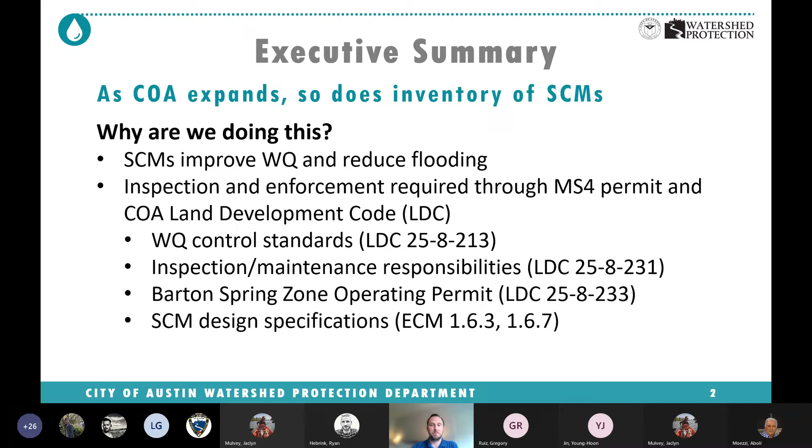Just to give a brief picture of what we're looking at here, this picture is the city of Austin. That's actually not the whole jurisdiction, but everything in blue is a commercial pond, and these ones in yellow are the residential ones. So obviously they're all over town, ETJ. We have about 8,300 commercial ponds, 1,050 residential, and about 265 of these Barton Springs Zone operating permits. And we're going to get into each one of these programs a little bit.

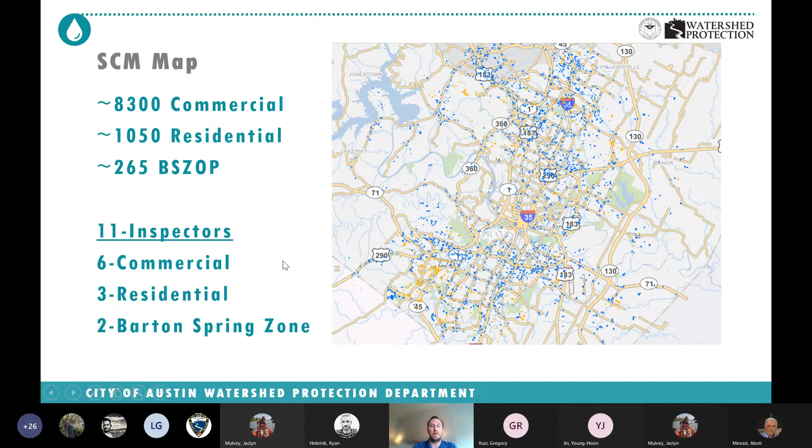The commercial ponds and the residential, we are on an annual inspection cycle, so we're hitting every one of these on an annual basis, or that's the goal. And then the Barton Springs operating permit, at a minimum, these are annual, but a lot of the technology, specifically the retention irrigation technology, gets multiple inspections a year. For a breakdown, we have 11 inspectors on staff, 6 commercial, 3 residential, and 2 Barton Springs Zone currently.

The point being is that we've been doing this a long time, and each one of these is laying the groundwork and foundation to build upon each other to improve our water quality and reduce erosion, etc. I'd like to just start with how do we get here? How does a pond, or SCM, end up in our inventory? This is just a cover sheet of a typical construction plan.

This is called a C8 plan. Basically, that's the type of plan for construction of a subdivision. But we have some review that's conducted on SCMs that are in the Barton Springs operating permit. So on the front end, we have some review touch points where we're looking at some of these plans before they're permitted to make sure that they meet code and criteria.

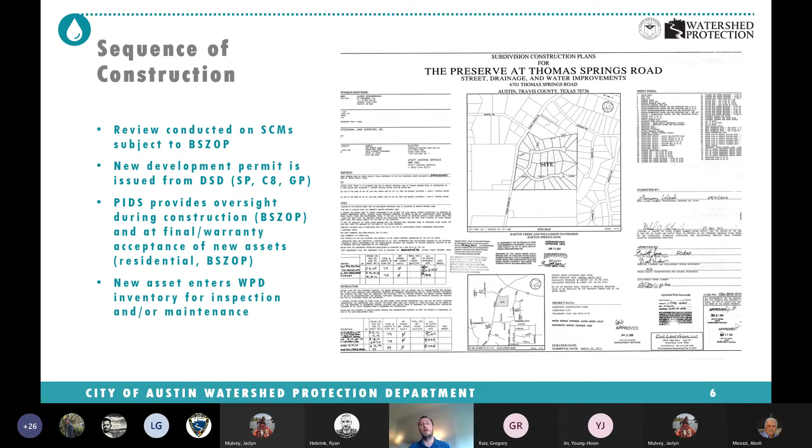Our pond inspection group, pond inspection dam safety, we have some oversight during construction. In the Barton Springs zone, they have oversight from cradle to grave on these ponds. And then on the residential side, we do warranty inspections as well during the construction period to make sure that we're getting assets that are going to be functional whenever they're in our groups to maintain. And then on the commercial end, every new asset that passes final inspection gets put into GIS, which in turn makes it an asset in Maximo for us to inspect.

I'd like to just lay this out there to show some typical layouts of how these ponds work and some different types. So this is a single phase pond. Basically, it's got a single basin. There's a few different types that work this way, detention and rain garden, some retention irrigation ponds. But basically, you have water that's coming into an inlet structure being conveyed through either overland or piped. This inlet structure usually has a splitter weir in here that sets the elevation for water quality elevation. And then if it is too much, it'll go to a flooding basin or out to the creek.

Water comes in. There's an outlet structure. If it's a detention pond, there's usually some orifices here, different holes that are cut out at different elevations to slow this water down and meter it as it is getting out of the SCM. And then typically there's an emergency overflow here, or sometimes it's in the splitter box.

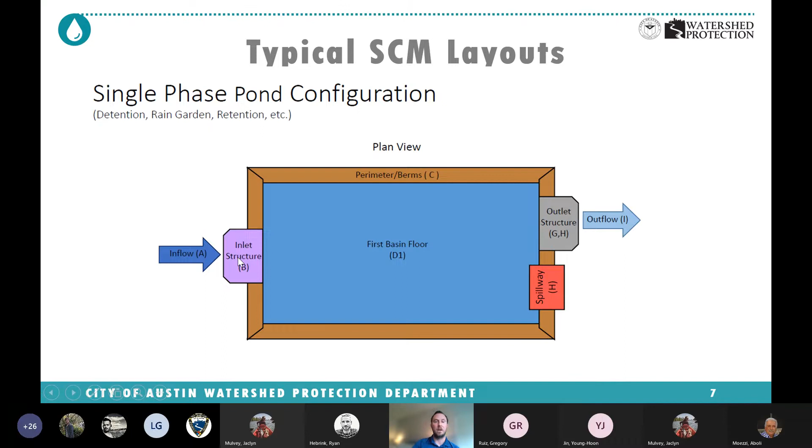This is kind of a dual phase. This is what we would consider a full sedimentation filtration, meaning that water still comes in that same inlet structure with the weir, but there's two different basins. So there's a first basin here with a concrete separator wall. This is the sedimentation basin. This will hold the whole water quality volume of the whole asset in this basin, and then it'll filter through this riser pipe into the second basin, which has the sand and filtration for the water quality, and then out.

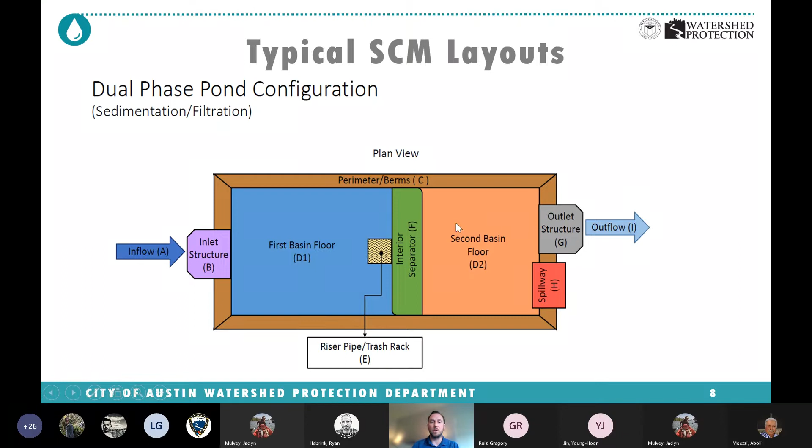Sometimes you'll hear full sedimentation and partial sedimentation filtration ponds. The partial just means it has a rock gabion wall instead of the concrete wall here, and then the water quality volume will go across both basins at once instead of just one.

And this is a typical wet pond layout. Same thing, you've got water coming in, inlet structure, you have a sediment forebay, which is basically the first location to have sediment, trash, pollutants drop out. There's an interior separator berm usually, and this is all planted with different wetland plants and aquatic plants that are doing biological processes to remove the pollutants from the water that's coming in here. And these typically have a permanent pool, so usually they're always wet.

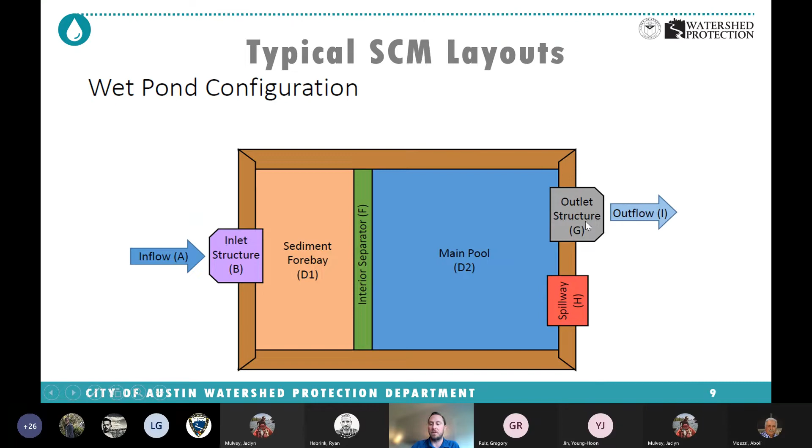So after it goes through there, there's usually a pipe through this to the main pool. And then same thing, there's the outlet structure. This is usually an inverted pipe to set the elevation of the pond. And then there's an emergency spillway. So in general, water and pollutants in the first bay, capture it here, filter it into the second one, and then overflow for detention purposes. So that's a really brief breakdown, but that's kind of just how each one of these work.

So I'm going to go into each one of these different programs just briefly. The Barton Springs operating permit is a permitting program for water quality ponds in the Barton Springs zone, this area here. So basically new commercial developments, privately maintained, that are going to be built in this area are subject to this operating permit. There's some caveats. There's some grandfathering: basically if you platted your land before the Save Our Springs rules and these operating permit rules came into effect, you could be out of this. But in general, most of this area is subject to the operating permit. It's a cradle to grave permit, from the time it ends construction and then in perpetuity.

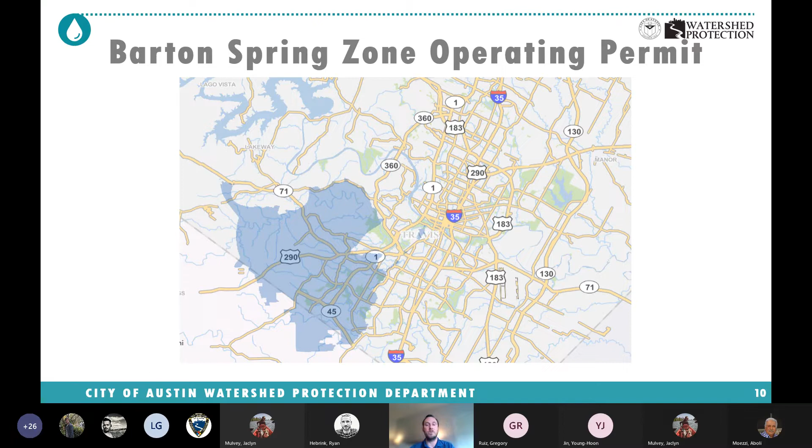Just going to show you a little bit of some of the projects in the Barton Springs zone. So this is new construction of a water quality pond going in. This is an impermeable liner, a geomembrane liner that's being attached to concrete walls to basically hold the water quality volume in this basin. They also added filtration, sand filtration basically.

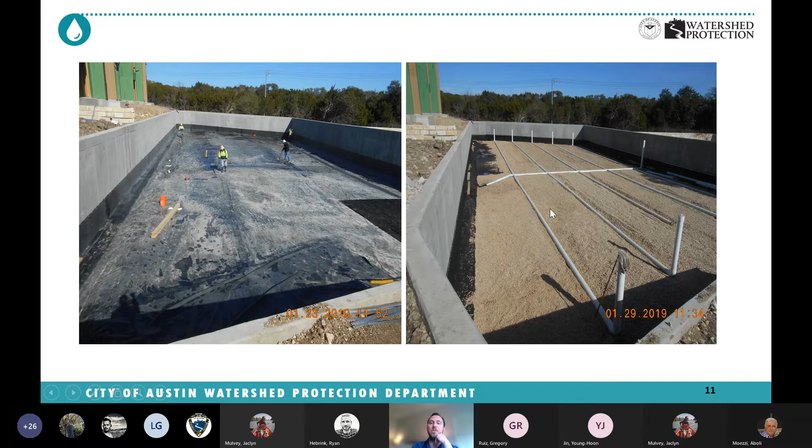This is a retention irrigation pond. So you can see that they put in the liner first, they put in the sand filtration, they work their way from the far corner out as they're creating this. And then the purpose of this is to make sure that this thing holds water. And so in this particular system, this is what we would call a leak check.

Typically we wait for a large enough rain that will fill the basin, and then the inspectors will turn off the equipment so they can see, is it holding water? There's only one way for the water to get out in these. It's through the pump equipment. So we do some monitoring to make sure it's holding water on new construction. It's a little bit different animal.

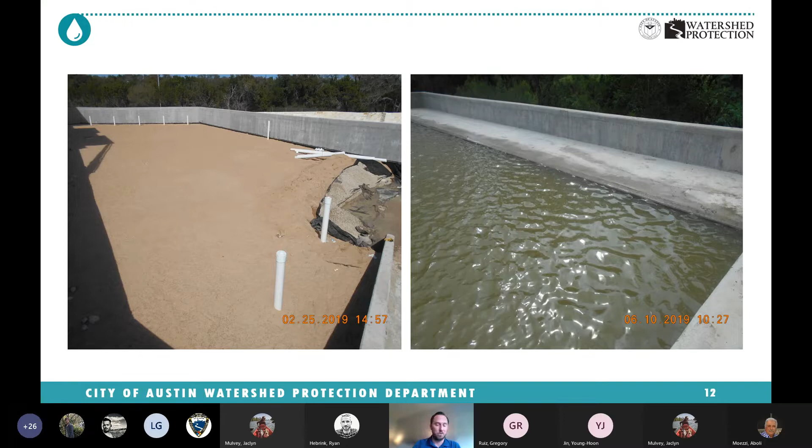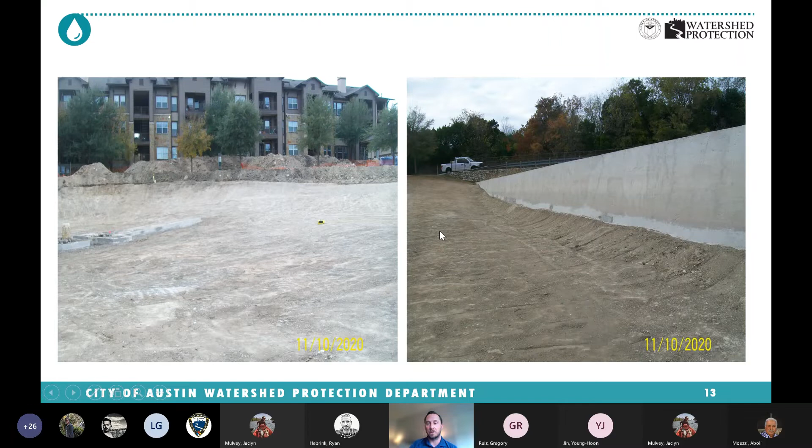This is post-construction. So this is a site that's been in operation for over a decade, but it was determined through inspections that the basin couldn't hold water. It was leaking and it needed a new liner. It's really the only way to fix it. After documenting this and issuing violations, working with owner and engineers, the inspectors were able to convey that, look, this isn't holding water. Here's some options. And so they decided to come back in and put in a new liner on this existing system.

I think this is a great picture because it's hard to see, but these are one-way check valves to basically isolate this basin from the rest of the system. We're trying to prevent leaking, and there's storm sewers, et cetera, that are beneath the water quality volume that could leak. So trying to isolate that with these one-way check valves.

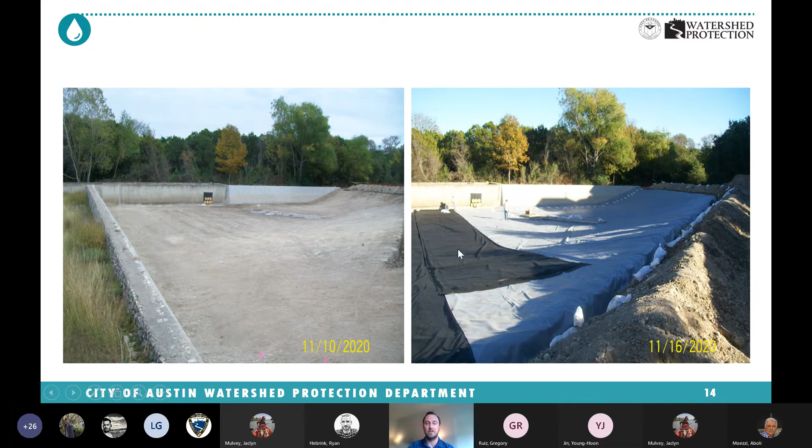And then you can see on the right-hand side, the liner going in, you have this anchor trench where they anchor it into the soil berm above the water quality elevation. And then they put this protective geofabric over it. And then you come in with 18 inches of soil typically as protective cover over the liner to protect it from any penetrations. And then you'll sod or grass this to get grass growing.

So just kind of a typical project. I wouldn't say typical, but it's a rehab project on a lot of these older systems that are failing infrastructure. I don't know the exact dollar amount on this, but these are not cheap. These are expensive repairs in the hundreds of thousands of dollars. So it's not an easy task.

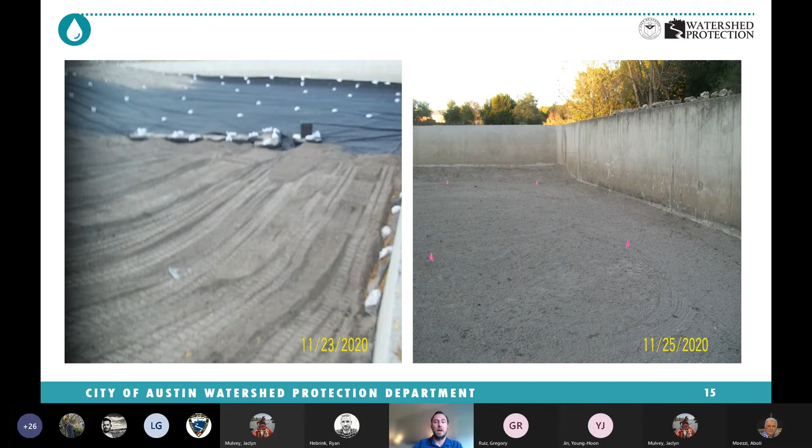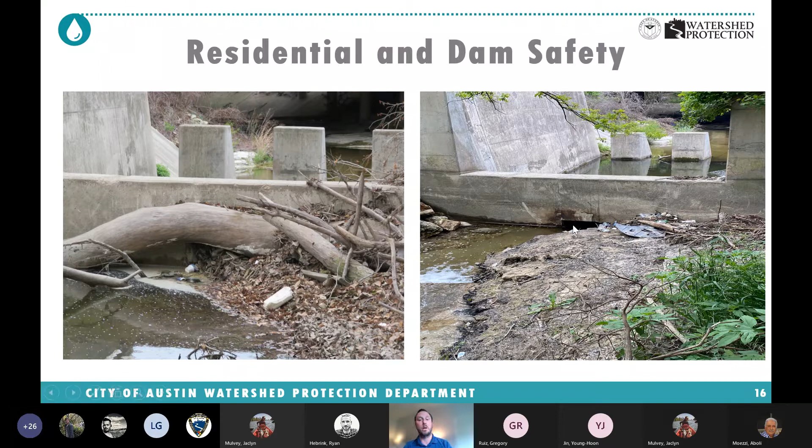I'll shift briefly to the residential and dam safety team. So this is the team that coordinates with our other groups for ponds that Watershed owns and maintains. As you can see on the left, this is Palmer Dam, and this is on a pre-storm recon by the inspector for dam safety. If we know that we're going to get a large enough storm that could engage some of these ponds, they come out and take a look, noticed this was blocked up, got with our field operations crews, and they're amazing, and we're able to get out there and clear this so that this outlet can be functioning properly whenever this storm hits.

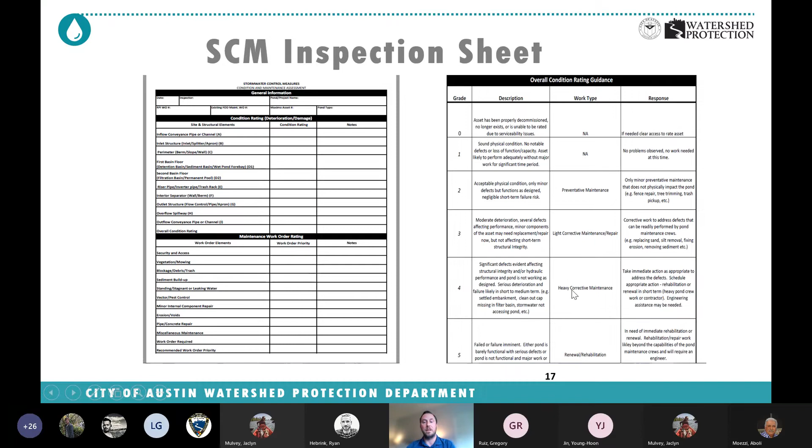I'm not going to go over all the ins and outs of this, but this is basically the pond inspection sheet that our inspectors use. On the residential side, we're giving condition ratings to all these different elements of the ponds in order to get a larger picture of the condition ratings across the board. Without dumbing it down too much, 3, 4, and 5 means that some sort of work needs to happen. 3 is light maintenance, 4 is heavy maintenance, and 5 is it's completely failed, needs rehab.

So on the residential side, it's a lot about collaborating with other work groups. It's a cross-divisional and cross-departmental effort to get these SCMs addressed. Our role is to basically identify the problems and then coordinate with the other groups to figure out the best way to get these addressed. We also make the work orders for our field operations crews, so we are working hand in hand with them. And I also feel like we have a role as advocates for maintenance activities.

So as the city expands, as the commercial and our own inventory expands, we have innovative technology that we're employing, which is great, but we also need to consider, and I think that we're doing a good job of this as a department, what are the maintenance and responsibilities for these types of SCM.

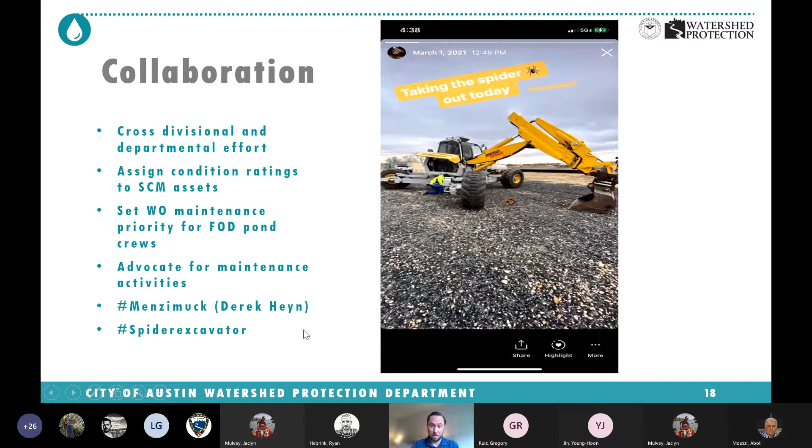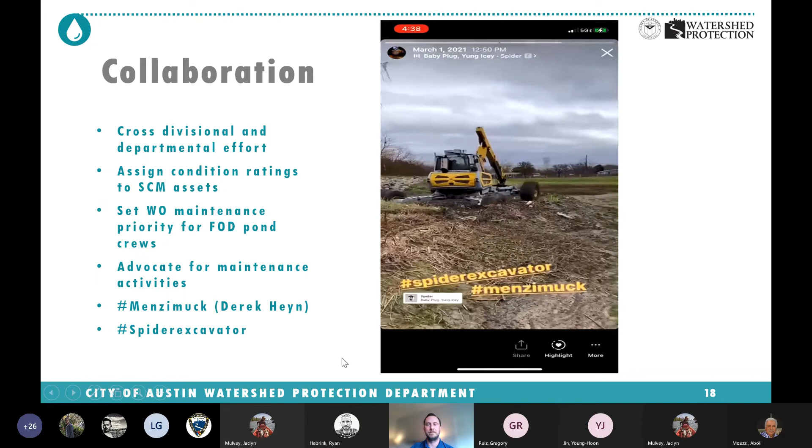Itsy bitsy spider ran up the water spout. Down came the rain and washed the spider out. Out came the sun to dry up all the rain.

I hope y'all can hear the music. But Derek and some of the FOD crews, the pond maintenance crews especially, they're trying to do a good job, and in my opinion, showcasing their work. I mean, this is a great 15-second clip to just set to some music that showcases some of the work that they're doing, and also this pretty amazing piece of equipment that can help them and us get to hard to reach maintenance activities. Here's another one that he sent over.

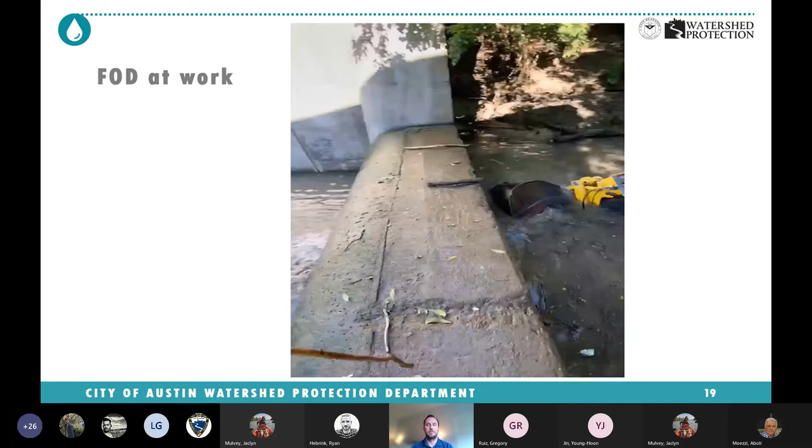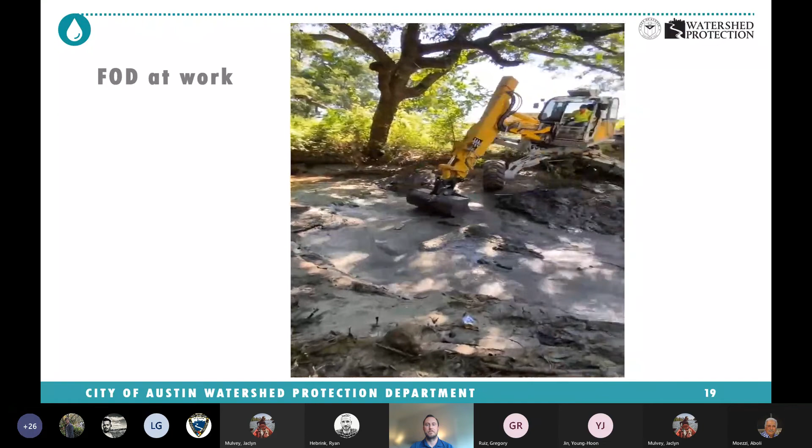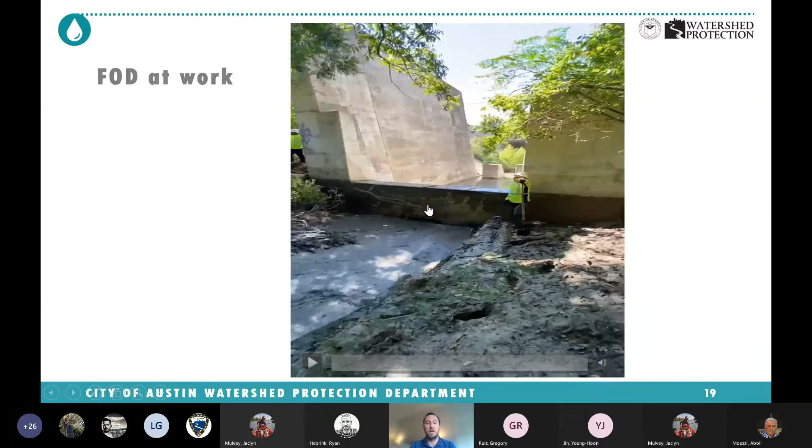Really good piece of equipment. This is actually that same Palmer Dam, different time, but clearing out the debris that's getting clogged up on this outlet. So big shout out to them.

And then we also have coordination with other groups within Watershed. Local flood group, now in PDD, but David Trujillo and Pam Kearfott's group. This is a dam called Mearns Meadow. It's a large regional detention pond that is considered a TCEQ dam. Their group was working on modernizing this dam, upgrading it, and as part of that, we coordinate to get some of the maintenance items addressed that needed to as part of the dam safety program.

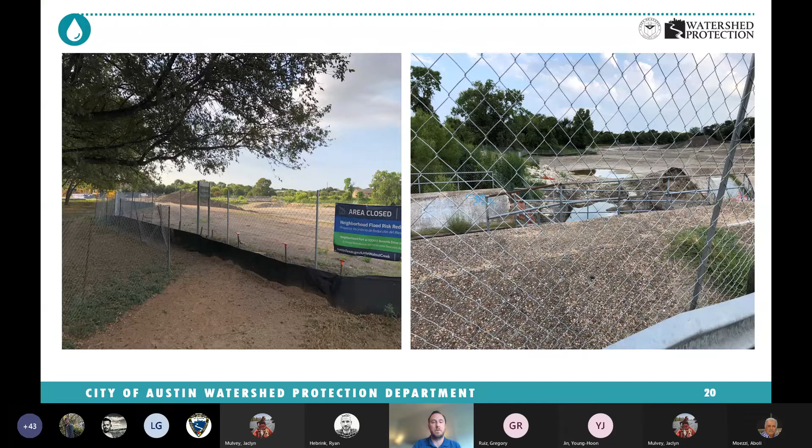So, just big shout out to them for being so willing to work with us and to incorporate some of our needs into their projects. So I think this is a huge success story. Same here. This is working with another group within Watershed, formerly the Water Quality Group, but again in project delivery. This is Tom Frankie and some of his colleagues.

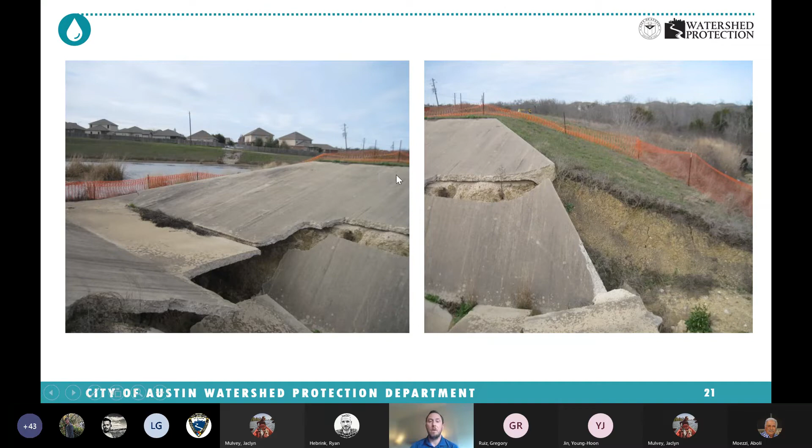This is a wet pond at a subdivision, Quintera, where through either, I don't know if it's design or just how it was built, but this emergency overflow had obviously failed. And so we had identified this as a problem, but originally we were trying to have our field operations crew do this, but in general, this was kind of above and beyond their capability to do in a timely manner. And so Tom sponsored this project and with others and used the IDIQ, which is indefinite delivery, indefinite quantity contractor that we have basically on retainer to come in and fix this outfall.

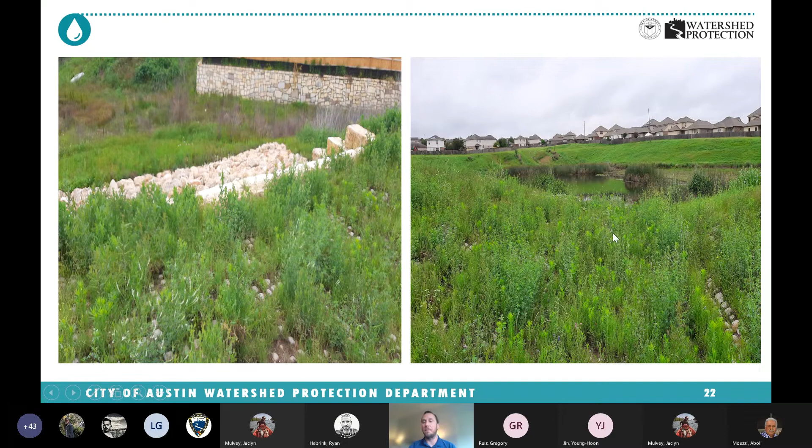So this is called Flexamat. It's a concrete that's laid out with vegetation allowed to grow in between it, and it basically locks this all in place with these limestone block outfall. So basically it went from this outfall that was failing, wasn't working to this new design that's working properly in a nice, beautiful wet pond that's been reinforced, but has also kept some of its natural characteristics.

As I talk about the commercial inspection and move to our enforcement side, this is just a video that I got the other day I thought was relevant. This is something that we get fairly frequently, and I feel is an important part of our job.

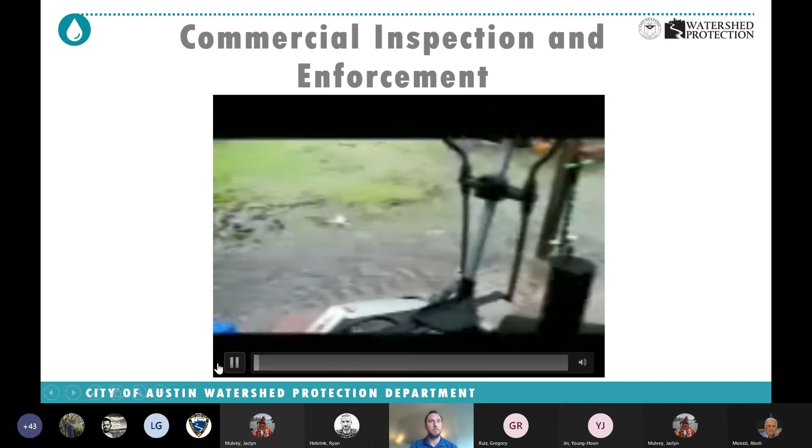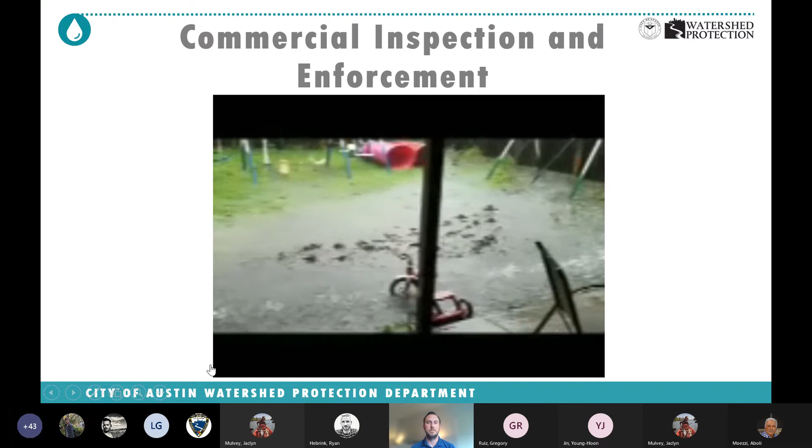Okay, the water's reached my patio now. That retention pond is flooded over, coming to my backyard. There's a stream coming straight from the retention pond.

So this is a homeowner who sent in a video. They live next to a pond that was not functioning properly. And so basically the outlet had been clogged, and so it was overflowing in a way that it shouldn't have been. Some of the berms were low. This to me is when people ask me, what do you do for the city, or how do you make an impact with our tax dollars? I mean, this is, in my opinion, a great example.

I mean, this is a situation where this pond wasn't working right. Homeowners were getting flooded. We were able to, through our commercial inspection and enforcement program, issue violations and work with the neighboring property owner to get it rebuilt and fixed. And I got some pictures I'll show you of it here in a second. But yeah, this is fairly typical on the commercial side.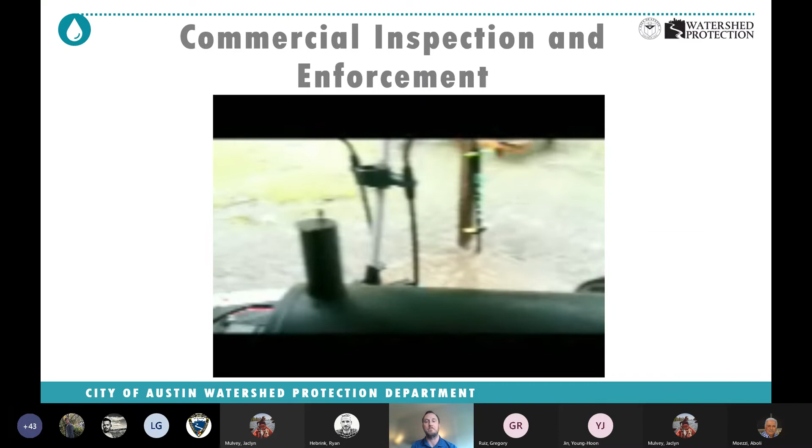So this is a pond where obviously the berm wasn't functioning. So they'd gotten written notice of violations. The way it works is it's kind of a 3-strike process. You get a first notice of violation, you get 60 days to address it. You get your second notice of violation, another 60 days, and we can assess a reinspection fee.

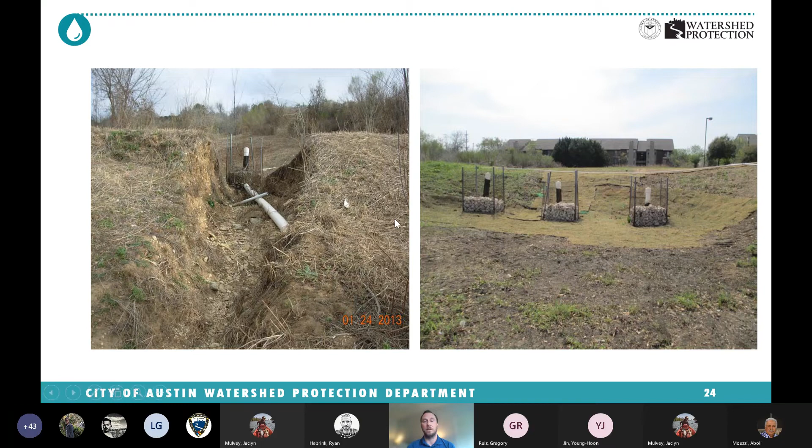And then at the third notice of violation, basically we can take it straight to court if we need be. I feel like this is a great project, a kind of example of how sometimes the scope of these is pretty daunting. So the Austin Housing Authority is actually the owner of this. It's some apartments over on St. Elmo.

And this is a wall for their detention pond. So it's like a stacked rock wall, mortared wall, that had failed. And this is kind of the same design on the other side. This is actually their biofiltration pond here that was having trouble draining. And so it was kind of a perfect storm: this wall had failed, this wall was about to fail, and this SCM right here was having trouble working.

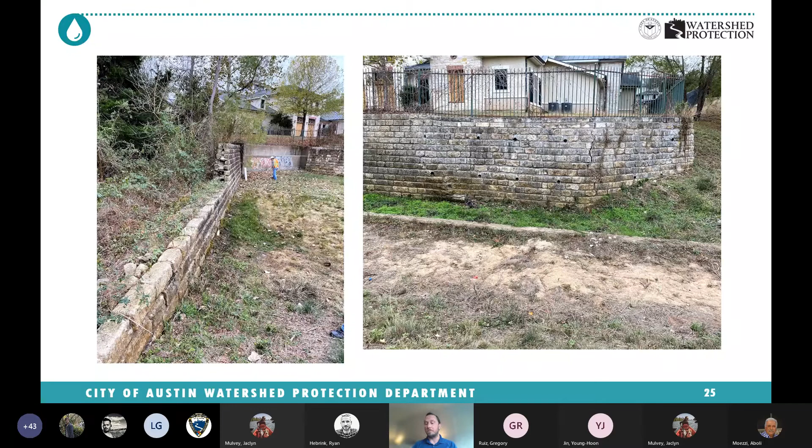And so they had gotten some violation notices. They were about to go to court, but they ended up not going to court because they hired contractors and engineers and fixed the problem. So this is a bird's eye view from a drone from the contractor, but I think it's a pretty good view to show the scope of the new wall going in. So here's the wall before, here's that new wall going in here.

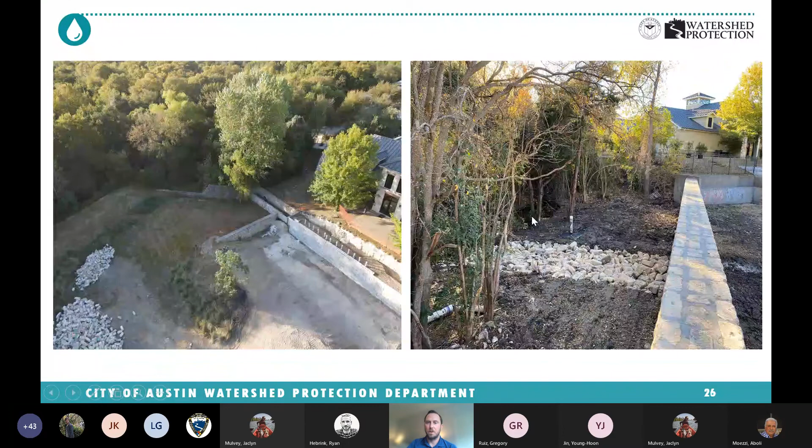This is that biofiltration pond that they're going to have to come back in and redo all of this, but they had to come in and do construction on this wall. This is that wall that had fallen down on the other side. So this wall right here, rebuilt, new outfall structure to the creek over here, and completed.

And so again, this is some drone footage that they sent, but I think it shows some of the scale of these projects to fix failing infrastructure. Again, this was an expensive project for them to fix. It's just some drone video showing the overall size and scope of this repair for these two walls and this biofiltration pond. So there's wetland mitigation that they're going to have to come back and replant. There's a lot of different moving parts on this particular project.

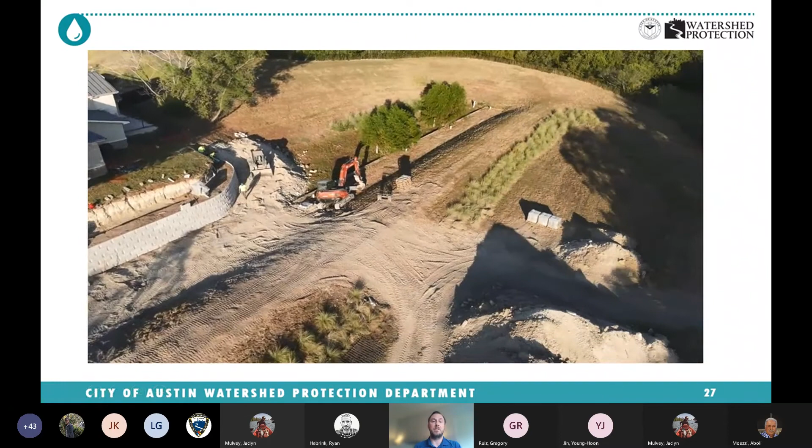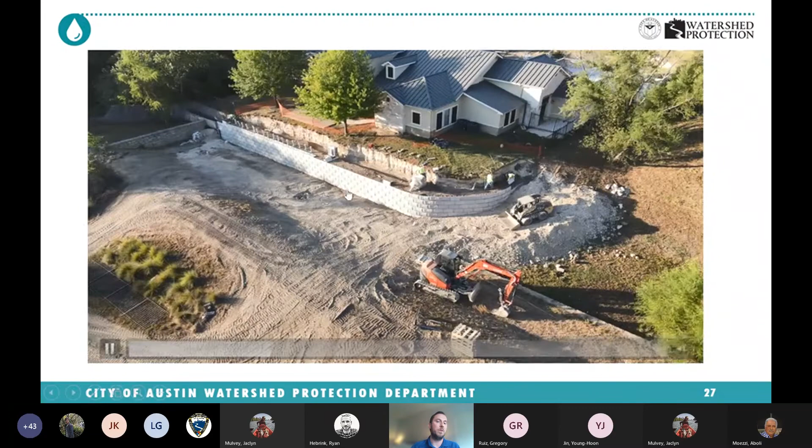But again, I feel like this is a success story. This is a pond that had been under violations for a while, had not been functioning, and now it's back up and running. We're just waiting for them to come plant the plantings back into it and finish it up. So I'm just going to show you one more time. In general, they got a new wall in there. They had to coordinate getting building permits on this wall. There were a lot of different steps in order to get this completed.

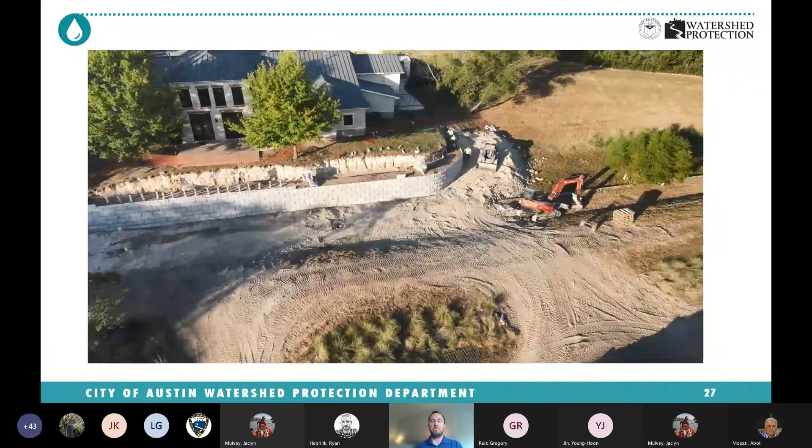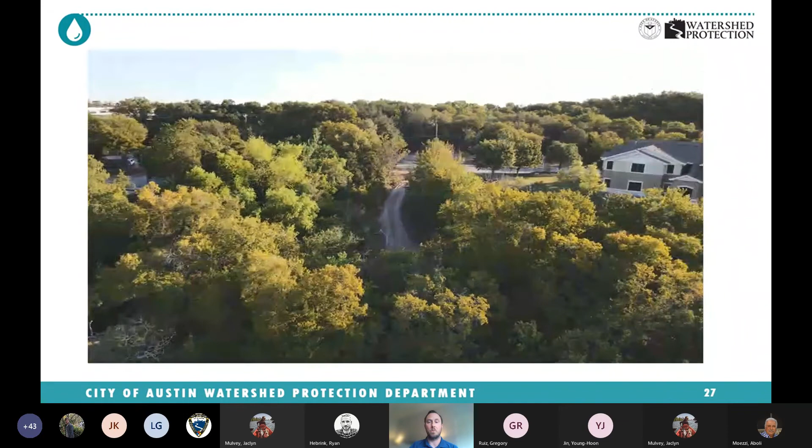So, in my opinion, it helps me remember what we're doing and why we're trying to do it. And kudos to the contractor for taking these videos and being reputable and taking care of this work. I think it shows a good success story.

We have to create what's called a stormwater management plan, and then there are control measures. Our group, the pond inspection, is part of control measures 1 and 2 for post-construction inspection, and then our maintenance inspection and activities. So I'm not going to go into that anymore. I'm going to let Julie go over it in depth next week, and I'm looking forward to that.

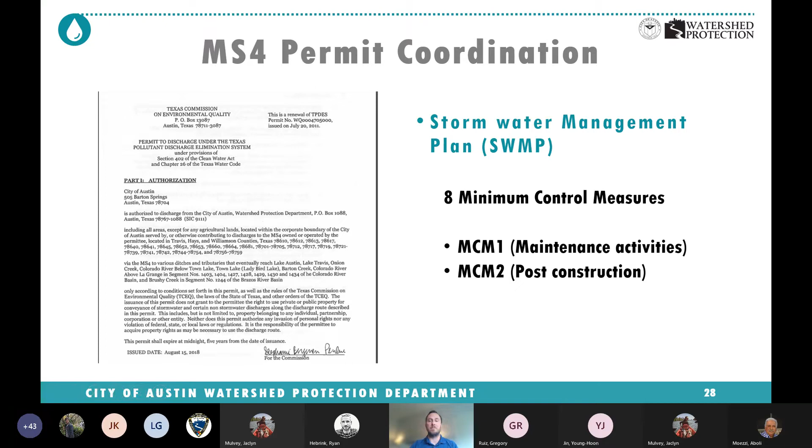So I'm just going to briefly go into some of the challenges that we're facing, and then hopefully we'll have some time for questions and answers. Our role, I feel, is not just to identify these problems, but to work with others in Watershed, within the city, and our other stakeholders to come up with solutions. One thing I've really realized since being in Watershed is we have an abundance of resources. If we need to, we can figure these problems out. It's just a matter of taking the time and getting the stakeholders involved.

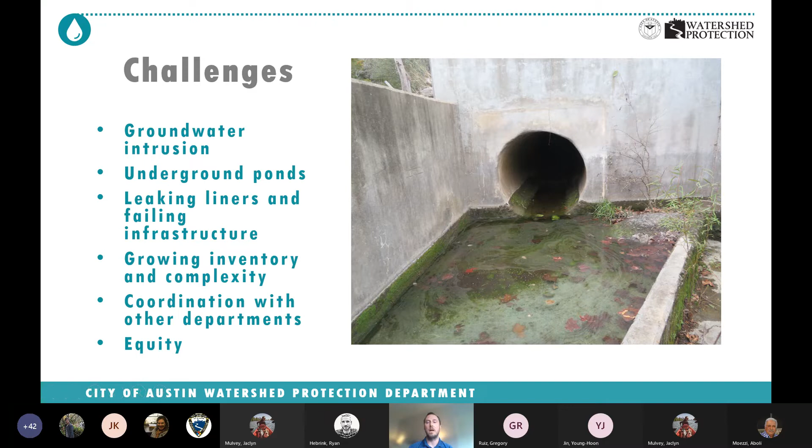And then lastly, from an equity standpoint, we're trying to look at everything through an equity lens now. We look at how are we spending our resources? Where are we spending our time? Some of this is regulatory driven. There's parts of town that have additional regulations that we have additional resources spent on, but it's still worth the discussion about how we spend our time and effort in an equitable way across the city.

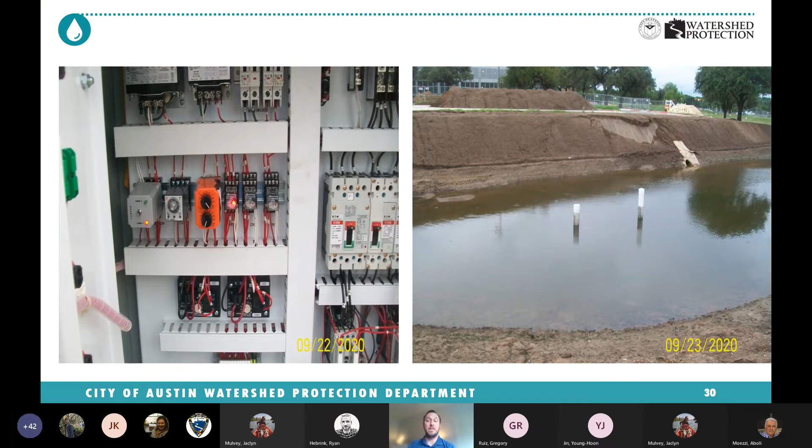And this is just a tough design where they're trying to put a liner on this. The site has a liner, and this slope is just too steep to have the protective cover on it. So you see it sloughing off the liner into the basin here. The whole thing is built. They're trying to put in sod now. So these are just some of the challenges that we come across. This is one where the engineer and the contractor have to fix it, and the inspectors on our side make sure that it's going to meet the plans and specs, but it's a challenge.

With that, I'll turn it over to comments and any questions. I didn't get a chance to look at the chat, but I hope that y'all found this informative and thought-provoking as we look at how we manage our stormwater within the city.

Thanks, Matt. That's an excellent presentation, and really such good insight on how these systems work to slow down and treat stormwater and the services that the pond inspection dam safety team provides to ensure that they're functioning properly.